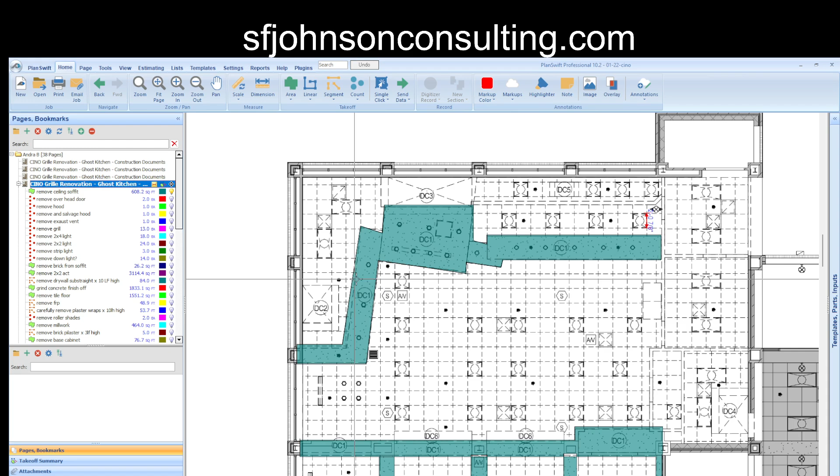And when it came to the lights, well, their guide wasn't really very clear, but I'll show you that later. Where ones were solid black, I assumed that they were remain, just like everything else here that was solid black with no broken lines. So first thing was all of the ceiling drywall. And then we have overhead doors that had to be removed.

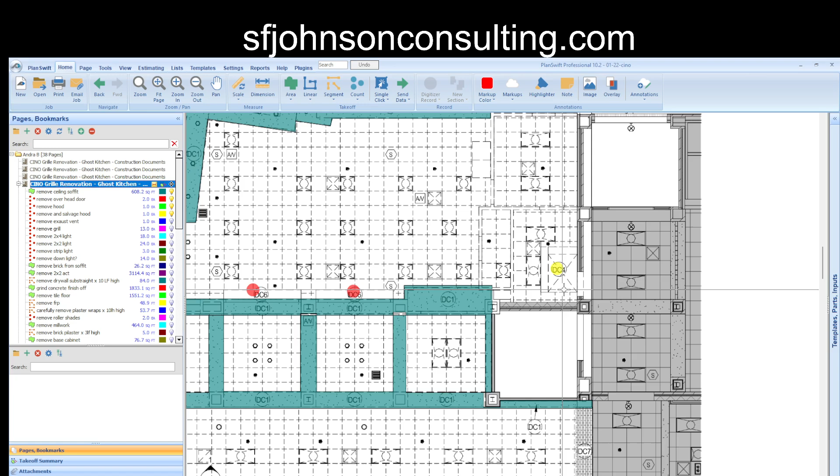And the hood they wanted you to remove. And there's another hood, but they wanted you to salvage that one, so take it down a little easier. Exhaust vent, remove the grill. So the supply and return grills, those are the ones that they wanted removed.

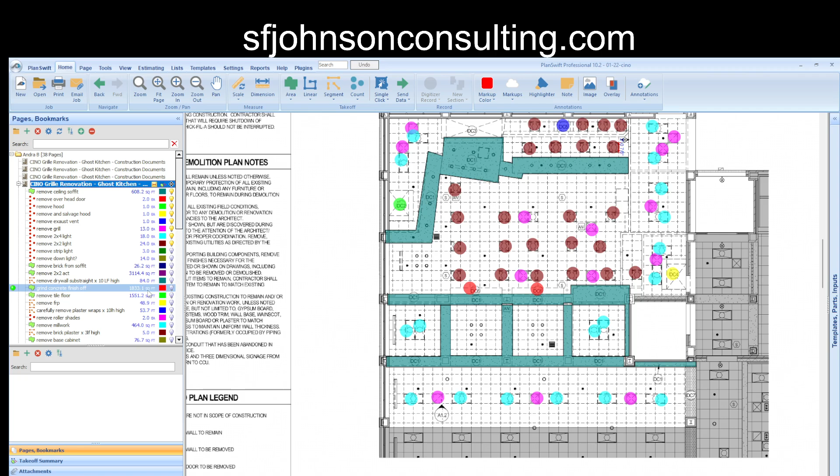Remove 2x4 lights and remove 2x2 lights. And then we have some strip lights to be removed and down lights to be removed. And like I said, the ones where they were solid, assume that those were staying like everything else that was solid. And let's go for brick from soffit. Is this right here? So it's going to take a good picture to realize if that adequately represents the area. And remove.

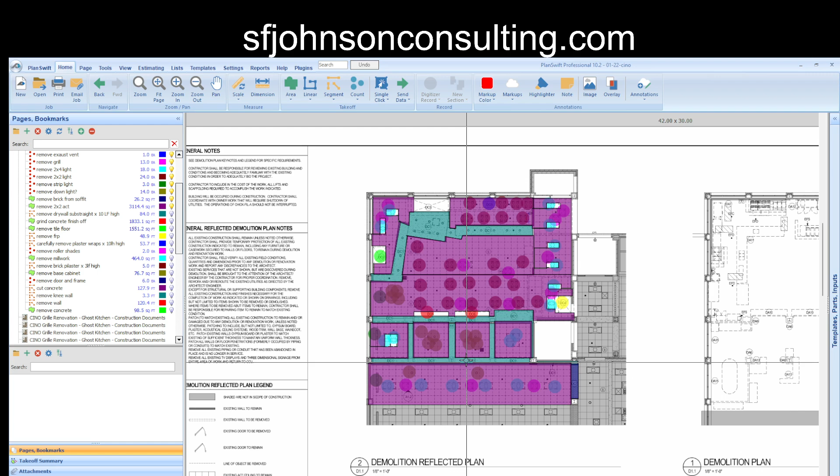They wanted you to remove the acoustical ceiling tile. Okay, so that's the full area of the ACT. So what we did is we removed everything first, right? The grills, the lights, the drywall, and then that's what remained. So in some cases I took out areas, some I didn't, because anytime you have an existing condition, there are some allowances you're able to give yourself because it's not new construction. And you have to be careful not to break a piece of whatever, because it is still going to remain. So you don't always have to be perfect. We gave enough of the openings off.

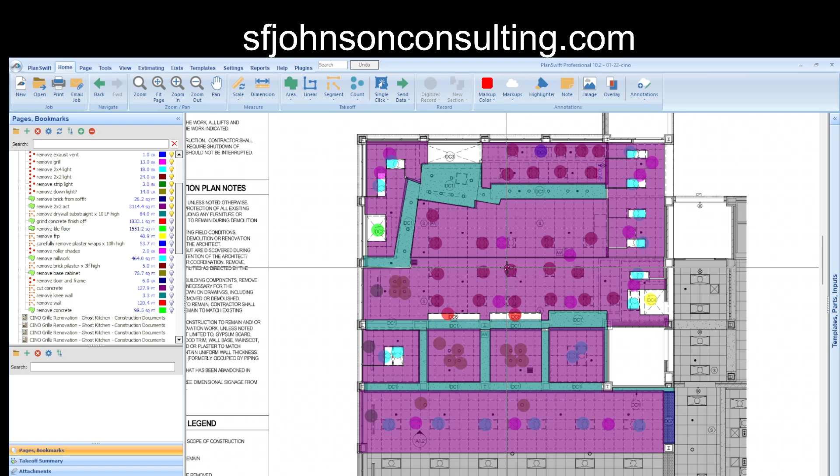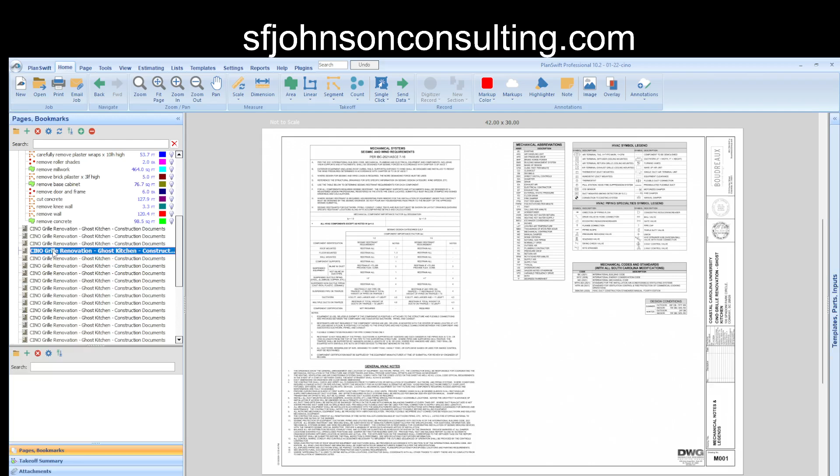Okay, so let's see. Remove drywall substrate up to 10 feet high. Okay, and that was remove drywall substrate up to 10 linear feet high. And so here at the exterior. And then we had an exterior view. Now let's go back to that. Remove drywall substrate up to 10 linear feet. So linear feet long, we have 84 times 10, so 840 square feet.

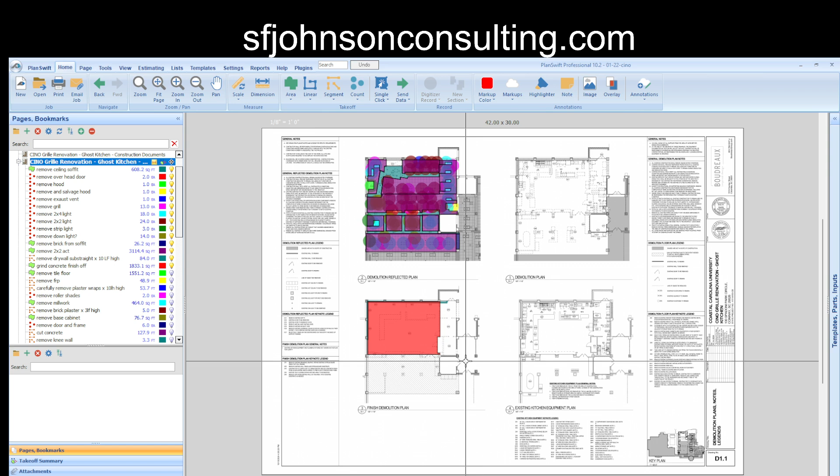Okay, next, grind concrete finish off of this area of floor. Remove floor tile. So, remove the floor tile, grind the floor tile. Okay, nope. Remove floor tile. Just as big as an area. Okay, so remove floor tile. So this gave us some good detail.

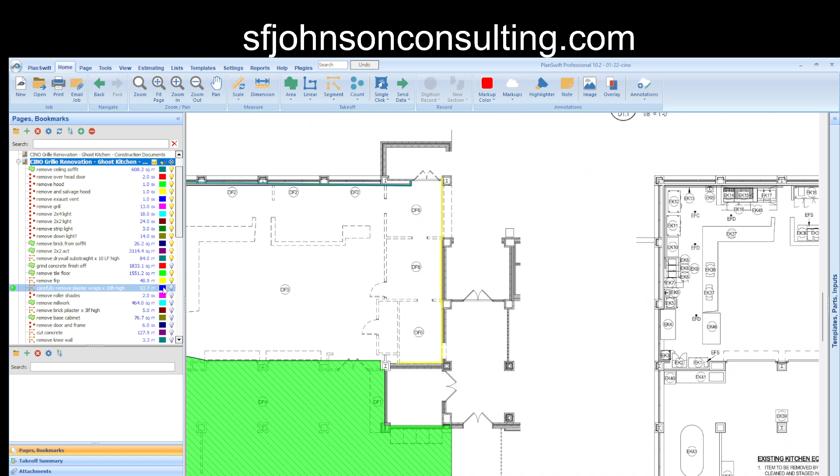Next is remove FRP. Okay, so this is a linear, and of course it didn't give us any height. So we can assume a 10-foot height. Removing the FRP, 48.9 linear feet, so basically 49 feet times 10, so 490 square feet. Okay, next, carefully remove plaster wraps, and I gave it a 10-foot height times that length. So that's these right here. It might be more, but when you do the walkthrough, you can confirm.

Remove roller shades, so that's just a count. And those are right here, 2 of them. Remove millwork. Now this one is a little difficult. So all the little millwork, the little bookshelf. But I wasn't sure, like, what's that? Or this one? That's cutting concrete, that's it. But is this part of it? So I just did the obvious ones.

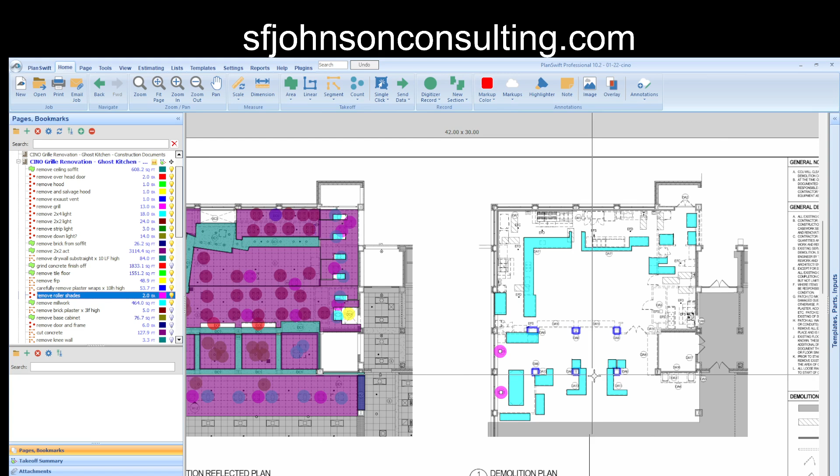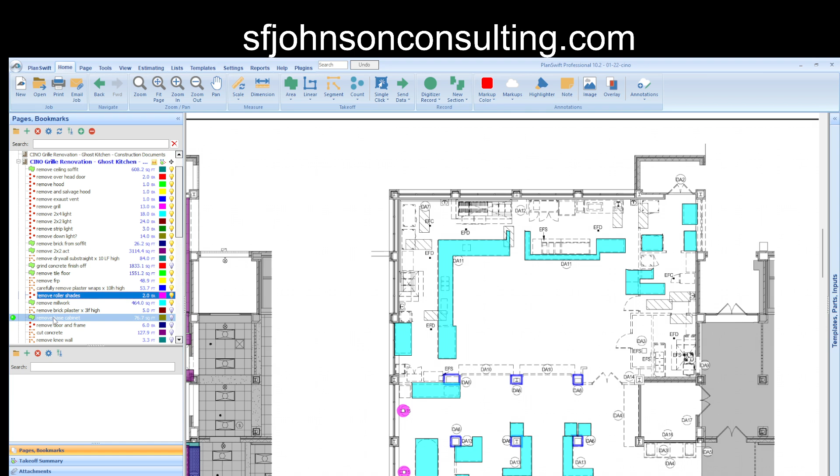And I don't think this is part of the millwork, I don't think. Okay, so I gave it a good amount, and then you can confirm more on this other stuff back here, because it said don't mess with anything in the kitchen other than what we say. I'm like, okay, well, what's that? I'm not sure. Okay, so let's go to remove brick plaster up to 3 feet high. So that's here.

Remove base cabinet. Let's go out so we can see it. Remove base cabinet. There. Remove door and frame. Goes there. Now that's what that was. Cut the concrete, because of the new renovation. No cost in the demo to replace that concrete. They may ask you to do it, but that's not part of this demo takeoff. But you got to figure, the same square feet that you are removing, you probably got to put back plus a little percentage. Okay, so that is cut the concrete, and we have to remove it.

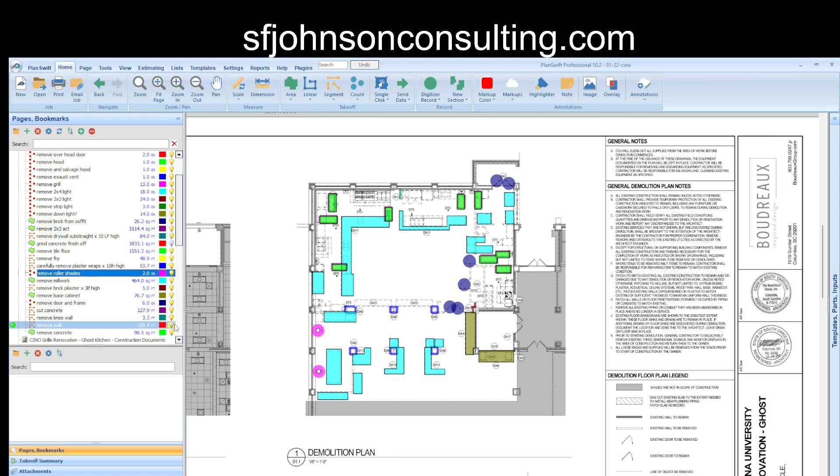Remove it, and then we have to remove a knee wall there, and then we have to remove walls here. This one is a pretty good one. Okay, so with this one, you just have to go back and review when you see the actual renovation. Give it a good review of all of these items and the totals, right? So you take what we did, and when you do the walkthrough, ask for one, because it's a lot of stuff, and especially the millwork, make sure you have it right.

That's how we priced it. If it looks like more, just add a certain percent, add 20% more than what we estimated. But if I said 10 feet high and it's 16, that's a big difference. And with demo plans, as we know, they're not very detailed, you got to be right from top to bottom, interior, exterior, everything.

So you have to put allowances in there and tell them, this price is based on this, or exclude it completely and make sure it's known that it has been excluded until you can update with better, fresher information. Okay, so if you have any questions about this, make sure you email me at education@sfjohnsonconsulting.com.